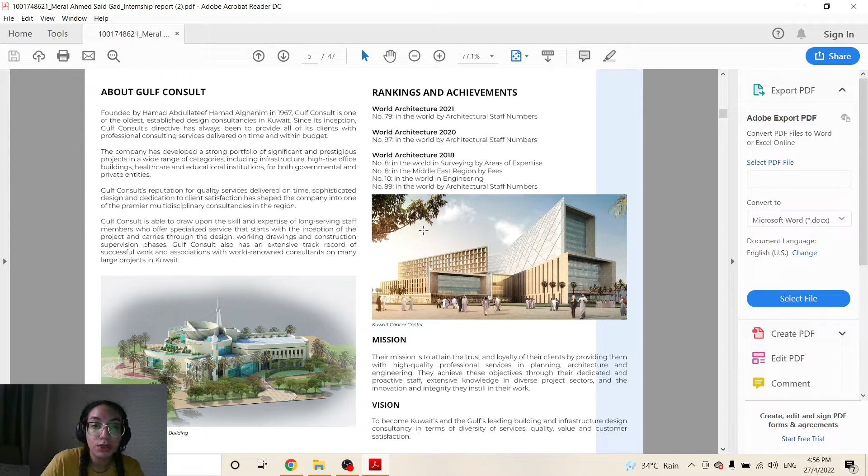Documents in this report have been used with permission of Gulf Consult and my supervisor for the purpose of this report. I would like to give a brief introduction about Gulf Consult, which was founded in 1967 and is one of the oldest established design consultancies in Kuwait. They have many rankings and achievements, including World Architecture 2021, 2020, 2018, and many others.

Onto the project that I was working on, which was the Farwaniya Hospital project. The client of this project was the Ministry of Health. The Ministry of Health of Kuwait appointed Gulf Consult to provide construction supervision and consulting services for the new Farwaniya Hospital project, located within the current Farwaniya Hospital campus.

The old hospital will be linked to the new one via air-conditioned bridges, and an underground tunnel will facilitate the staff's movement.

Basically, Gulf Consult's role includes supervision of operations on site to ensure the work being done is compliant with the final construction documents approved by MOH. Gulf Consult's duties also include project administration tasks, on-site operation tasks, and contract closing out tasks.

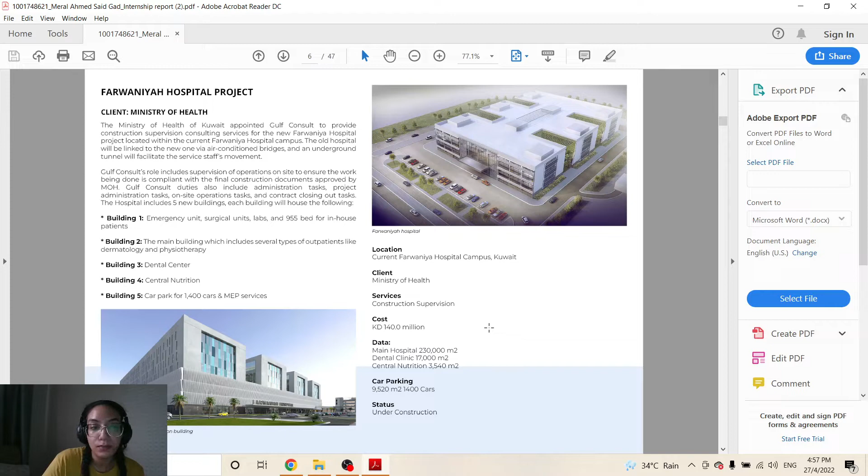The status of this project is under construction, and here are some shop drawings. The shop drawings are drawings that have already been finalized and gotten approved.

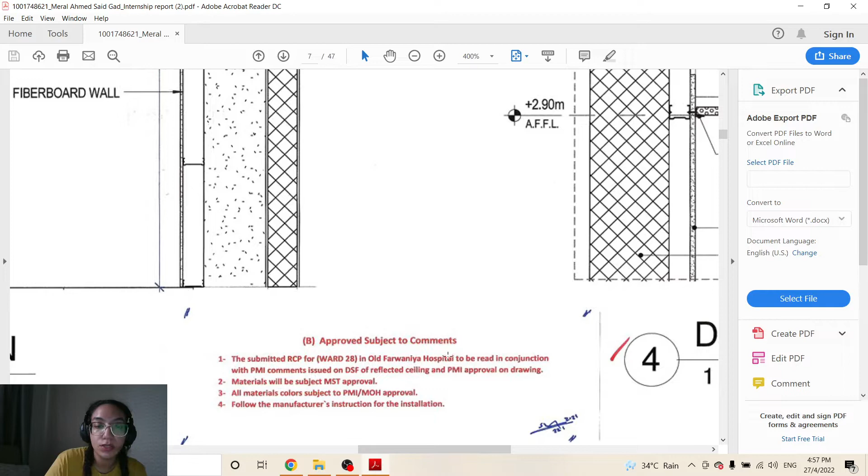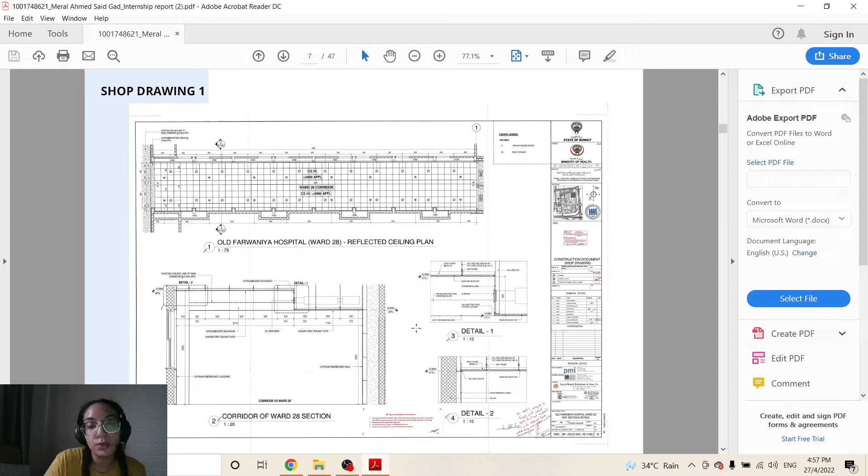If you notice, there are a few of these stickers saying 'approved subject to comments', and this basically means that approval is only subject to these points already being met, whether according to amendments or any kind of fixation that has to be done to the materials or items on site, according to shop drawings, as-built, or as per contract.

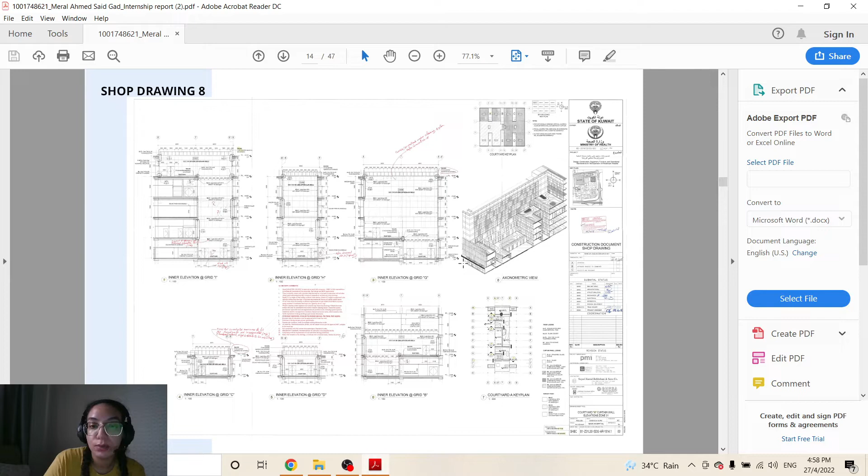Any of the highlighting, comments, sketching, or whatsoever on these shop drawings, I've either reviewed, had a part in sketching or drawing or commenting on, or helped in the process of doing so. That is why these shop drawings are included in this report, to showcase how I was able to help out in these kinds of tasks of commenting and sketching, and further.

Next is as-built, or what we call detailed drawing. These detailed drawings are according to the shop drawings, or according to materials and details of certain specifications on site. I would also like to explain that when it came to as-built drawings or any kind of editing and reviewing, my task was pretty simple.

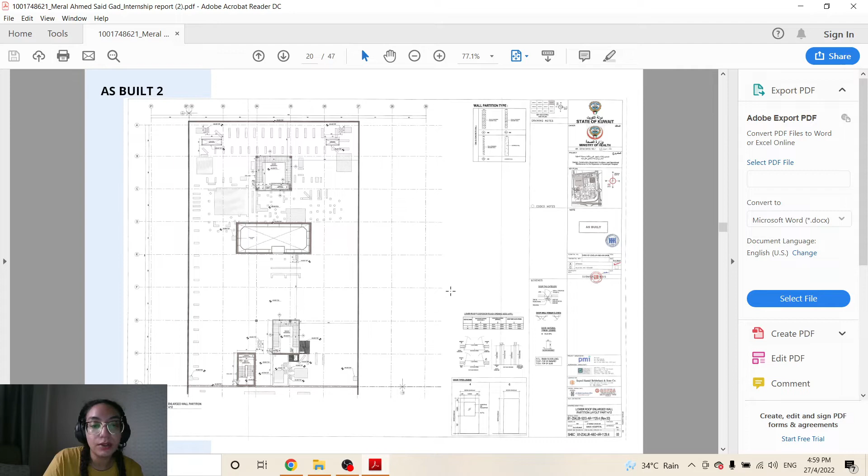It was just to add specs or any kind of identifications or lines, very minimal kinds of things, because these drawings have already been approved and documented by higher authorities, so they cannot be further changed or amended. It was only very small, minor fixations that needed to be done, and I was helping out in that aspect.

Next are checklists. Checklists are basically things that need to be done on site and are waiting to be done. These checklists are added along with a plan, a sketch, or a sketched plan, to pinpoint exactly where the checklist item is pointing at when it comes to the things that need to be done.

For example, checklist 1: primer coat for floor to start painting epoxy. For this, there needs to be final approval, subject to the following: apply primer coat in any missing areas, clean the area completely before applying epoxy, and the contractor is responsible for coordination with all disciplines. That is attached with a photo of a basement enlarged wall partition setting-out plan, 1 of 2.

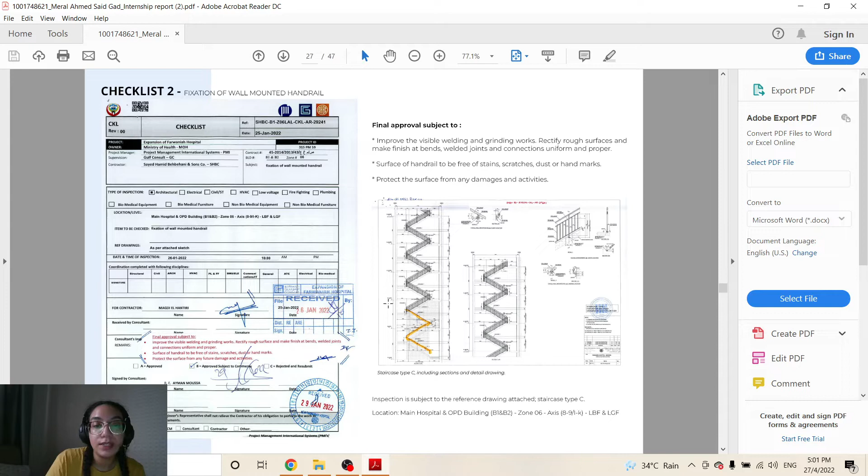Usually all the checklists will have a final approval subject to a postcard that is plastered on top of the checklist, along with a plan, details, drawing, or section of whatever exactly it is that the checklist is pointing at or talking about, in order for whoever is fixing or amending these things to easily find it.

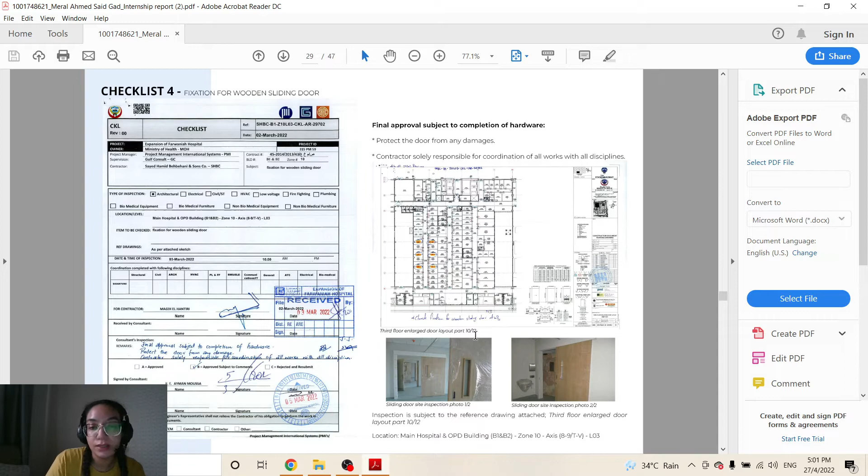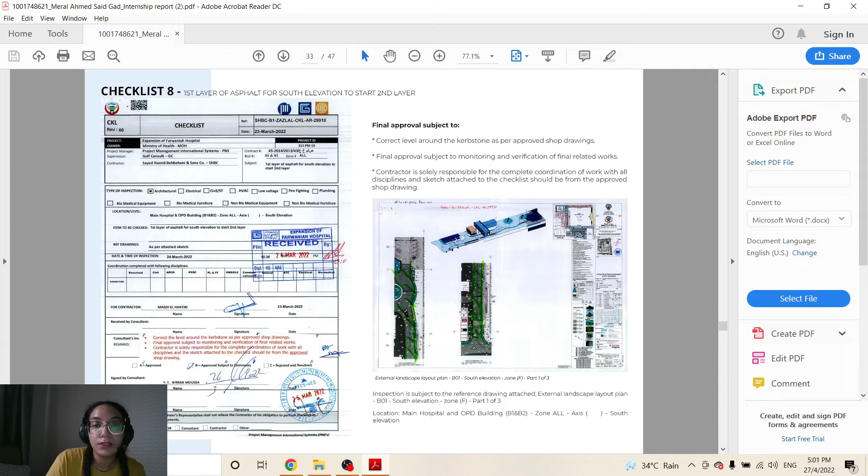Sometimes there is also photographic proof of whatever it is that needs to be amended and fixed, and it is also added to the checklist. Any kind of fixation, any kind of highlighting and drawing on the plans, I have helped in or have done myself.

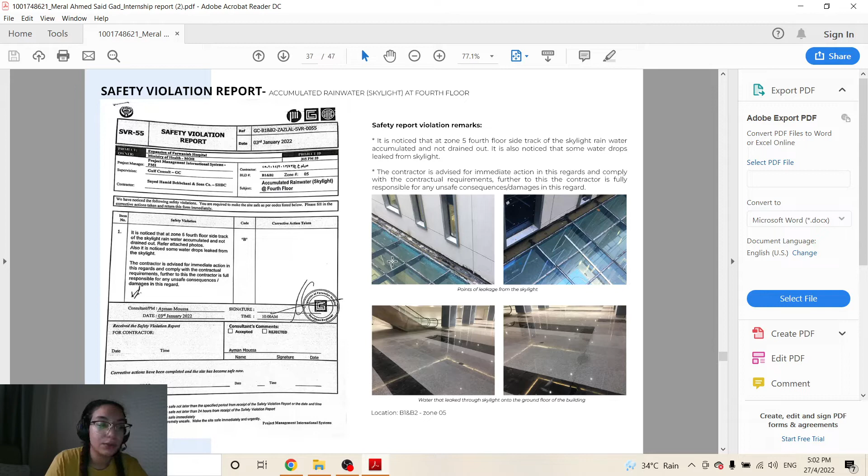Next is a safety violation report, filled in when there is a safety violation code. For example, here there was accumulated rainwater from the skylight that leaked into the ground floor of the building. I was also in the process of helping fill out the safety violation report. It was the first time for me to help out with such a task. It was very different for me because I'd never seen such a report before and didn't know it was filled out so extensively.

Next are JSI reports, which are basically reports made in case there are things on site that do not follow the contract, shop drawings, or as-built documents. These are written with remarks on the job site instruction report, along with pictures.

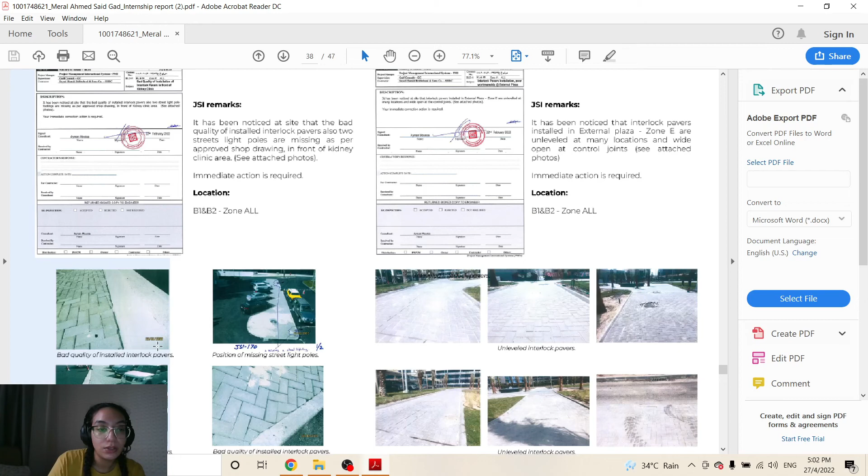For example, here there is bad quality installation of interlock pavers in front of the kidney clinic. There are pictures of these badly installed interlock pavers, along with missing light poles, which are also sketched to show where they're supposed to go versus where they're actually missing.

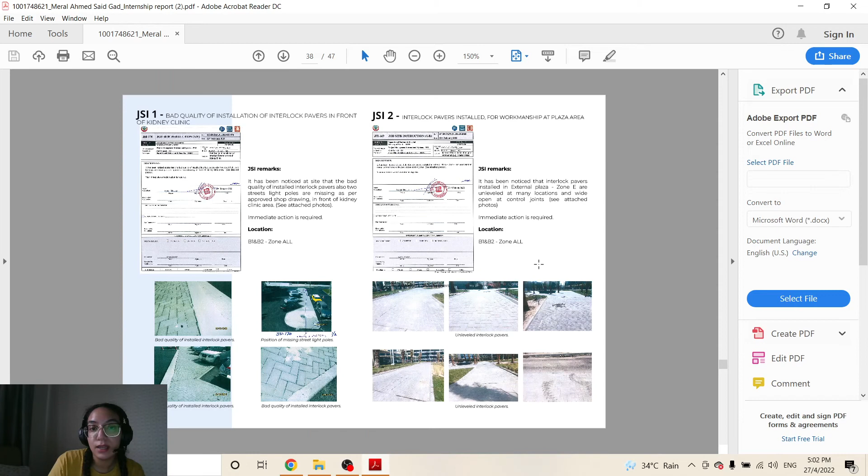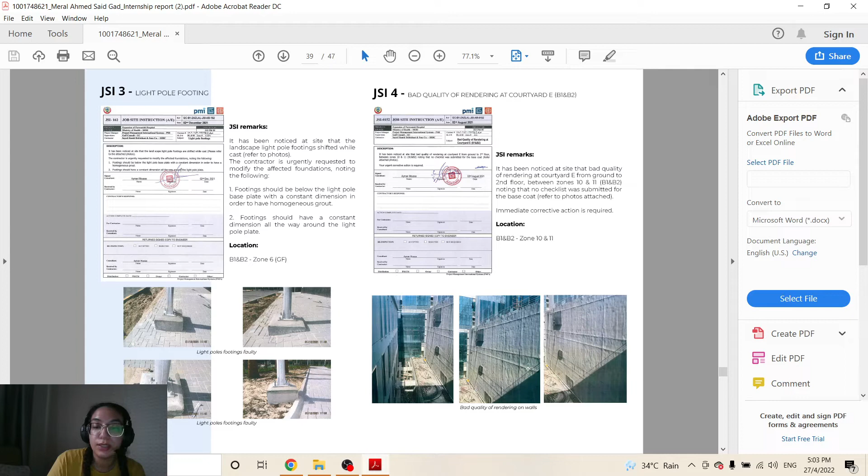Here as well, there is poor installation of the interlock pavers around the manhole, with gaps between the pavers. There's also a light pole footing where the dimensions are not constant and the footing is improper and needs to be fixed. Bad quality of rendering at courtyard E - rendering in this context is basically the external paint of the building.

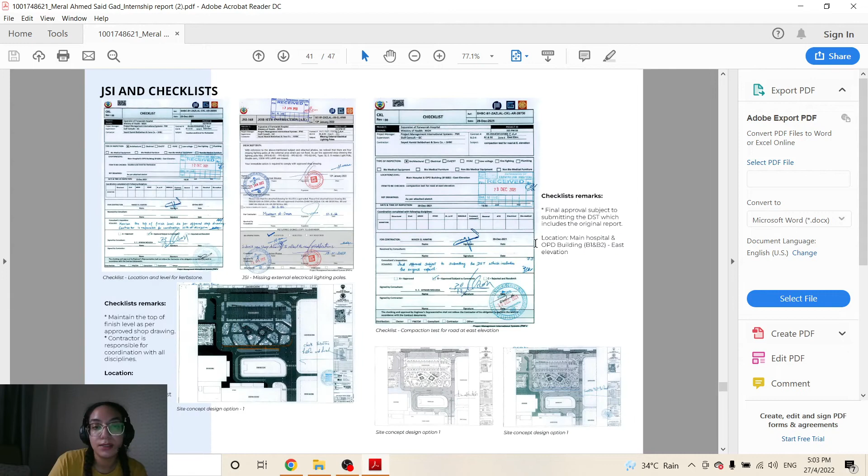The MIR is the material inspection report. If there are any materials on site that do not follow the contract or shop drawings, there is an extensive, very long report that needs to be filled out, including the specifications of the materials that do not follow the shop drawings, what materials actually came back on site, and all the paperwork used to get these materials replaced. More JSI and checklists, and then site visits and inspections.

I did a lot of site visits. I had daily site visits every single day, and although they were virtual, they were extremely enlightening and informative. The daily site visits and inspections gave me insight into how the construction process occurs for different parts of the project. It also helped me identify materials I'd never worked with or seen before.

The information learned from site visits is priceless, and it's an experience every architect must get used to, because ultimately site visits not only allow us to gain more technical and practical knowledge about materials and construction processes, but they also offer opportunities to build valuable life skills we can apply in our daily lives and office practices.

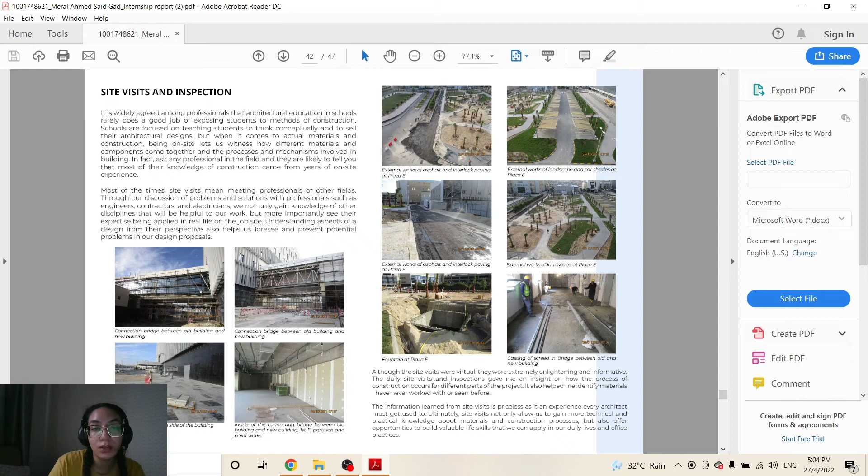These pictures are actually from the virtual site visits I've been to. They're either taken by the senior engineer or senior architect and my supervisor, along with any comments regarding the site visits and inspection processes.

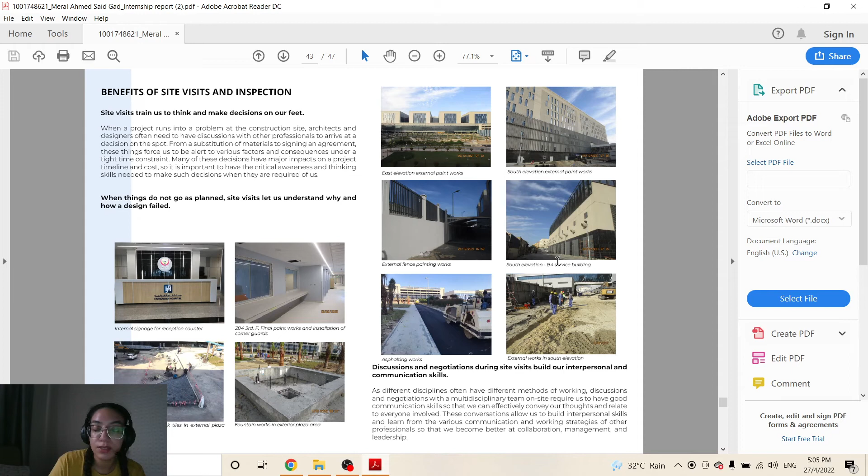I also mentioned some of the benefits of site visits and inspections, which include training us to think and make decisions on our feet. When things do not go as planned, site visits let us understand why and how a design failed. Discussions and negotiations during site visits also build our interpersonal and communication skills.

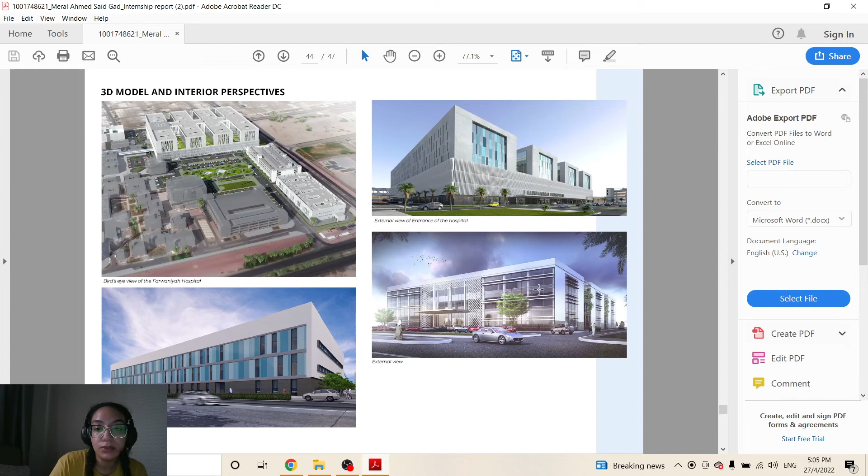Here's a 3D model and interior perspectives of the Farwaniyah Hospital building, along with more perspectives and the 3D model.

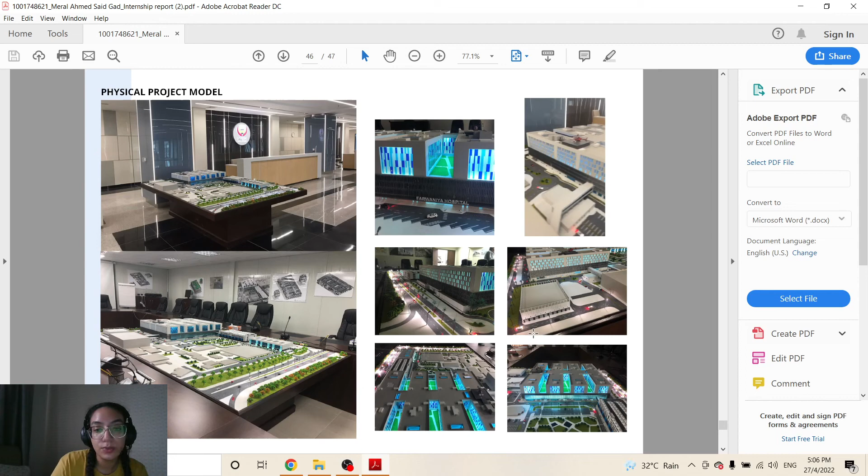Here is the physical project model, which I was very privileged to be able to see. It is a very professionally done model, and it was very nice to see. It's like seeing the project come to life before it ever does, and that's why I really appreciate models in general - this one really made me appreciate them more.

In conclusion, throughout my internship I've learned so much about how work in the office usually works, and it has actually helped me identify many aspects of architecture and construction. The various site visits have always helped me so much in understanding the hierarchy of tasks, reports, drawings, and much more. It was rather enlightening to do this report as it made me almost relive the situations I faced during my internship.

I would really like to thank our university for the internship experience. It was really an experience that cannot be repeated, a once-in-a-lifetime experience that I would never forget. That is the end of my presentation. Thank you very much for listening.